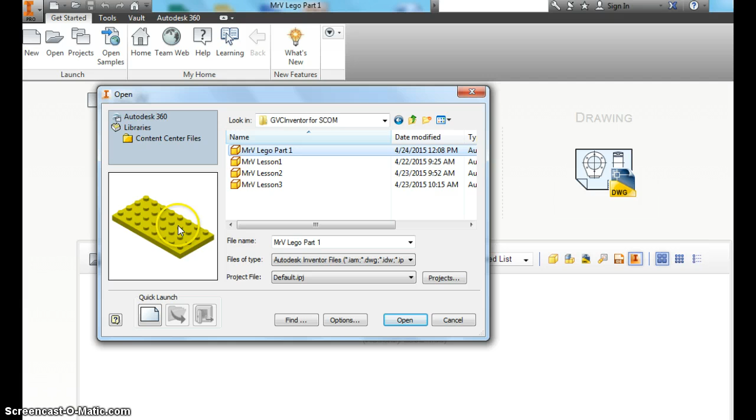You should have it saved as Mr. V Lego Part 1. Click it, get a preview on the side, and that's what we want. Hit open. The last thing we did was this rectangular pattern on the bottom, but we're still not done with the bottom just yet.

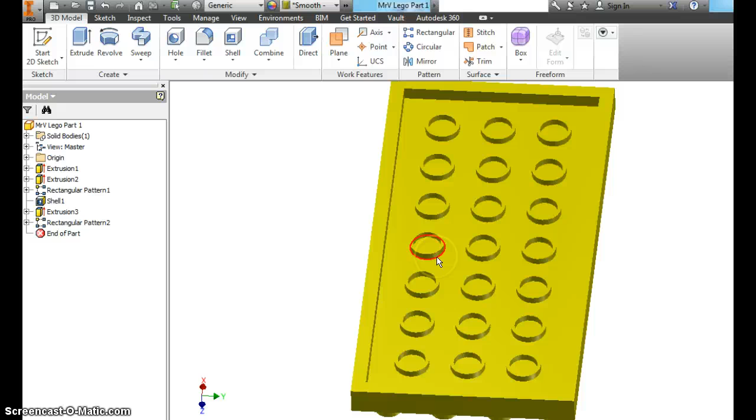Rotate it around where you can see this. We're going to make another sketch in here. There's some more circles on the bottom, and once you start doing this, you can come check the piece out. I'll have it set up on the table for you in the classroom.

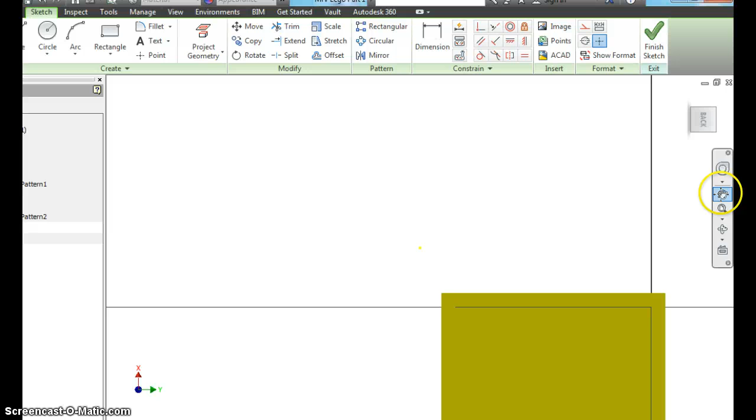Right click, new sketch. That's our face we want. Use the pan tool to maneuver that where you can see. I'm going to lean it back just a little bit so I can see. I like being able to see these holes where they're at.

Now what we're going to do, we're going to put 8 smaller holes and extrude them into it instead of coming out like these have. There's 8 smaller holes 4 times. There's a couple ways you can do this. You can make one circle and do a rectangular pattern, but getting the spacing right with that is pretty difficult. So we're going to do it a different way.

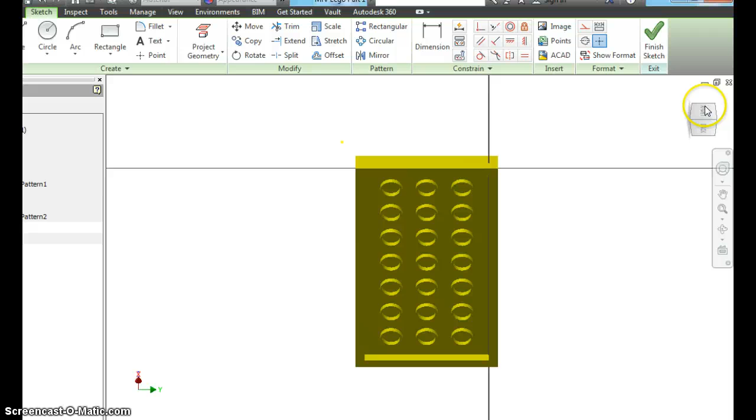I'm going to pivot this where I can see it a little bit better. And that's perfect. Now this color's glaring, pretty shiny. If you want to change it to a different color, that's okay. We need a circle.

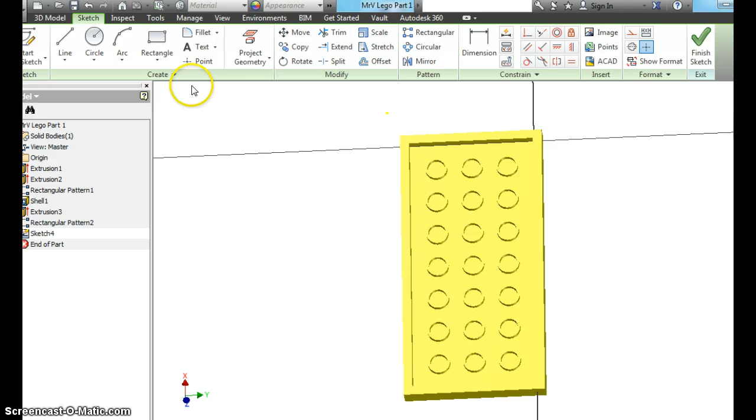This is going to be a really small circle. I'm going to start right here. I put that as 4 millimeters, but obviously that's way too big - you can see it overlaps. So we're going to go back and add a dimension.

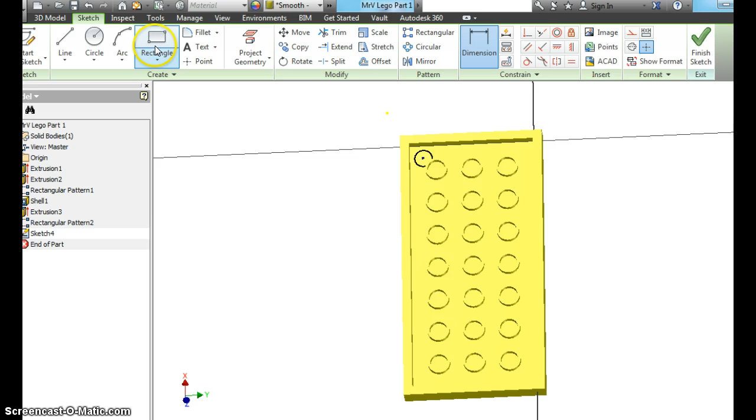Let's see... I don't like that. So go back there, let's undo that. We've got so many dimensions in here, you can see sometimes it becomes a problem. So let's drag that one and make it 2 millimeters. Hit OK, right click OK.

This is where using that trackball is really handy. To move your circles, you can't grab them on the outside edge or the circumference - you have to grab them at the center point. It's not letting me for some reason, but that's okay. So we're going to move this up a little bit. Let's add a dimension from here to here. That's one of the problems, we've got so much stuff going on.

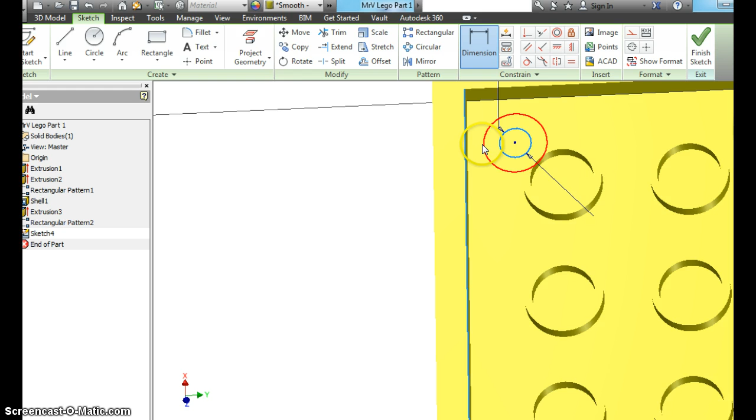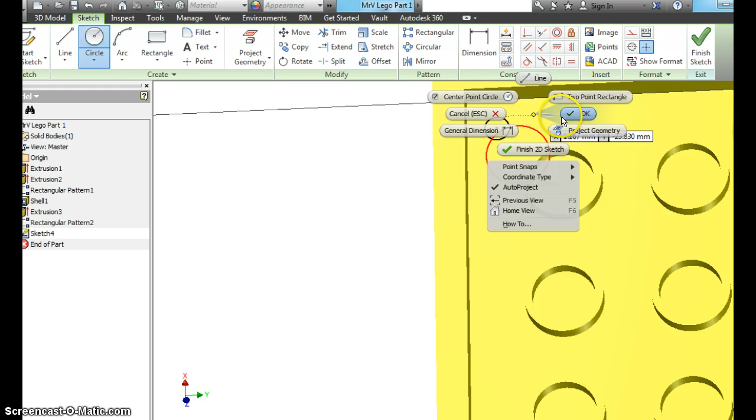We don't want to add a driven dimension. So we're going to do the circle again. I've paused it for a second and did some practicing and figured it out. Click a circle here. Drag it in there. Add a dimension to this circle - I want you to make it 2 millimeters.

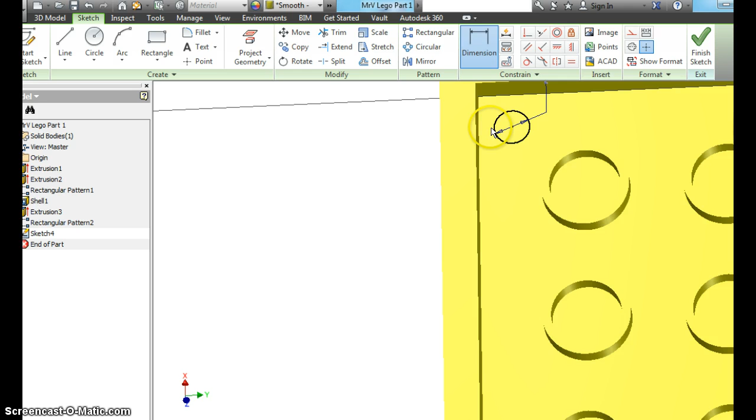Now here's why you want to zoom in. We're going to dimension from the center of the circle to this line here, not up here. So you got to zoom in with your trackball and make sure you get it right. Turn your dimension tool on - it should still be on from adding it to the circle. Get this red one here, bring it over. We're going to make it 1.5, moves it in close.

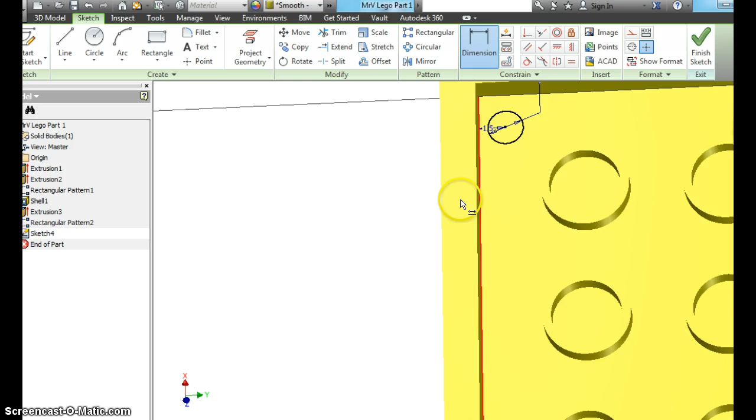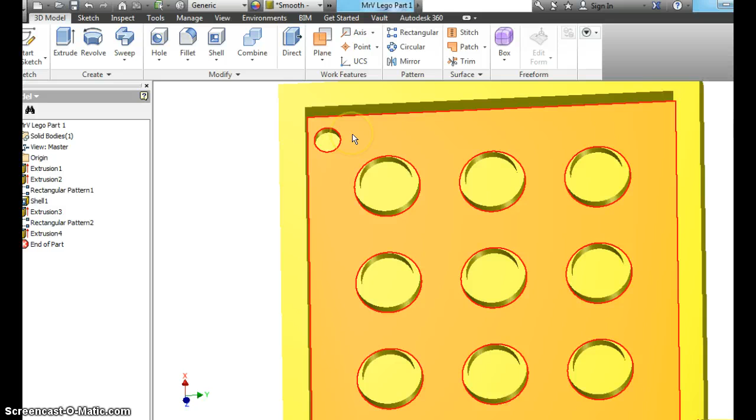On the back of this Lego piece, there's 8 of these circles going down. I'm going to go ahead and do an extrusion there. So finish 2D sketch, extrude this. We want it going into it, and we only want it going in 1 millimeter. It's a really small circle, and you can barely see it, but once you zoom in, you can see it's not very deep.

Now we're going to make it going across. We're going to do that rectangular pattern. We want this shape, direction 1, going this way. Move this to the side - there's going to be 4 going left to right. For spacing, 7's too much, it's going to be 8.

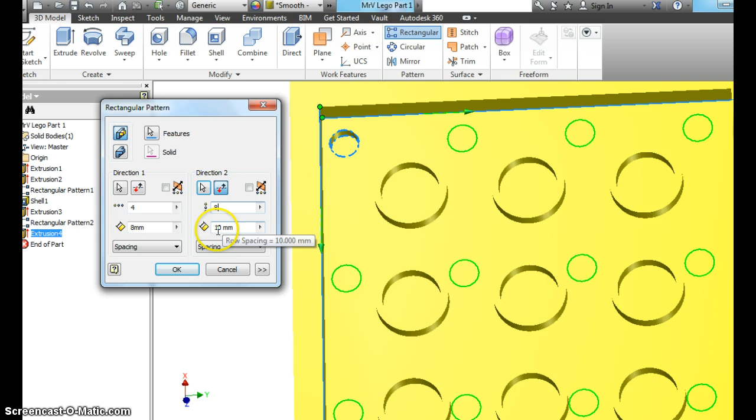Direction 2 is going to be down this line, and you can see it goes up - flip it. We want 8 of them, and I want this one about in the middle, so let's try 10 millimeters here as well. I'm going to zoom out so I can see, and honestly that looks pretty good. That's about perfect, so hit OK there.

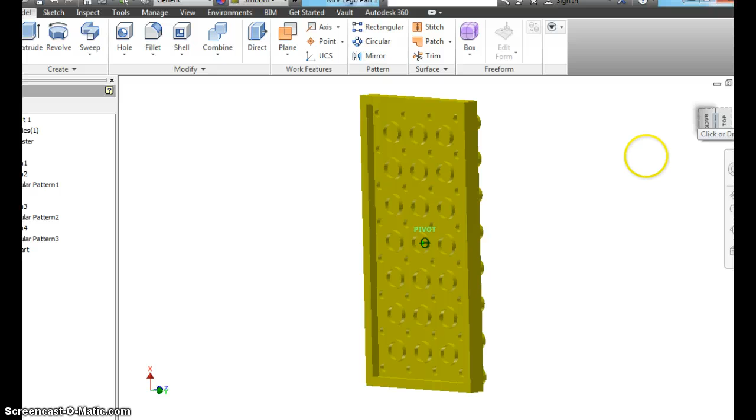Now you've got the bottom of that Lego piece done. Again, you can come up and compare it and you'll see how close it is. There's one last thing we're going to do on the top here.

The last thing we're going to do, we're going to put some text on here. Lego - if you look closely at the piece we're using, on the top of all the little connecting pins, it actually says Lego. So I'm just going to spin that back around, let you see what we've done so far.

We're going to right click here, new sketch. Okay.

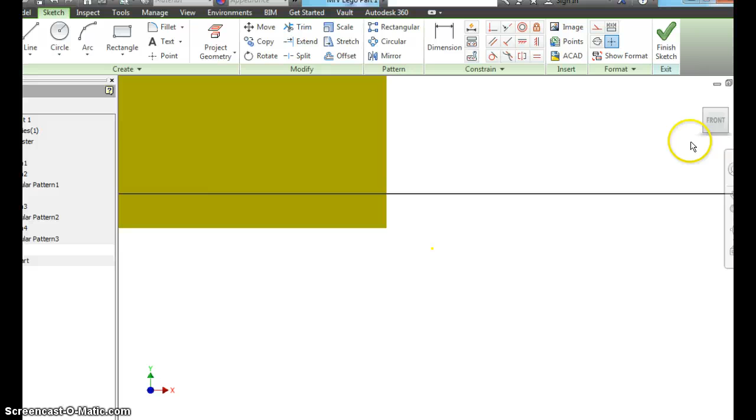Turn it around where you can see the pin. Let's see, I don't want to do that. So I'm going to click in this upper corner of the bottom, then zoom in and grab my pan tool.

This is where Inventor gets kind of complicated, but that's okay. This is a pretty complex part we're doing. This isn't something simple like we've done earlier.

We're going to do a text feature. Okay, we want that right here. And it brings it up. So I'm going to type Lego in all caps.

That size is way too big. We know that. Let's make it 0.95 millimeters. Okay, and I'm not real happy with that, we don't want it to do that. Okay, so let's undo that.

Put another text bar in there. Size was pretty good.

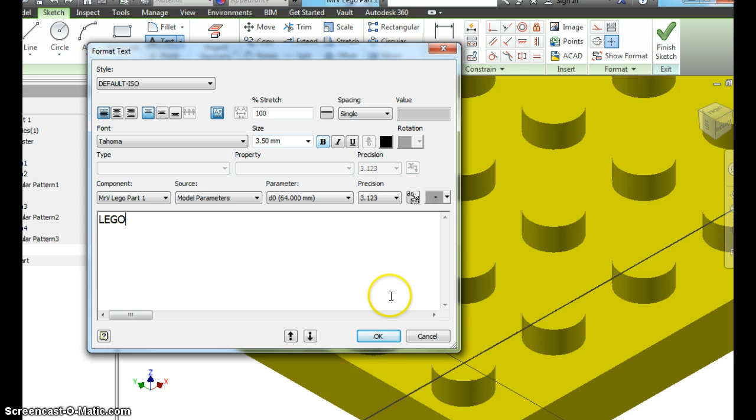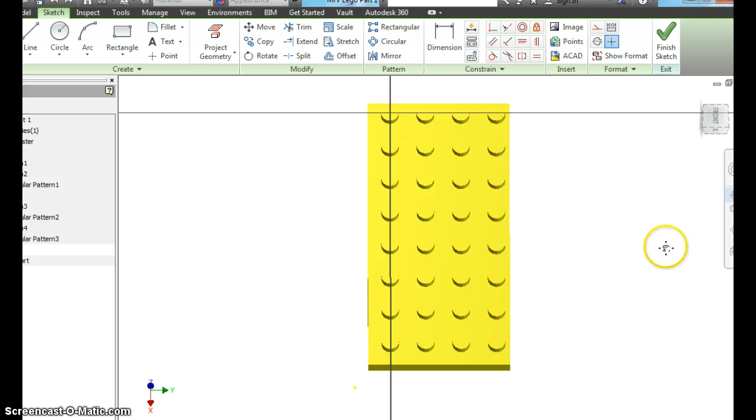Okay, you saw the text didn't go the right direction, so we're going to fix that. Click your home button, click front. You can't see your pins obviously, so you're going to have to drag and pivot a little bit. Then come over here and get your pan tool, move it where you can see, turn that off. Let's zoom in, go back to our pan tool, and you can see we're getting, again, this is a pretty complex project. It's not something simple.

So now we're going to try and put some text on one of these pins. Make your little text box on the circle. Let's type Lego. Let's change the size to 0.95 millimeters. It's still way too big. Okay.

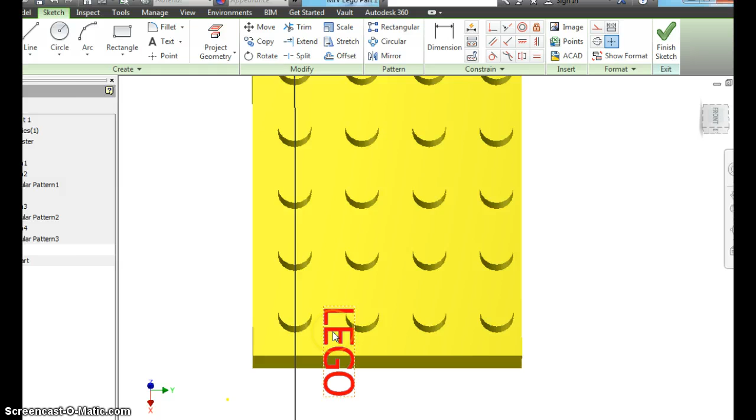Okay, so you can double click that text and edit it. That size looks pretty good. Now we have to figure out why that's going that direction.

And we're okay with that. For what we're doing, that's fine. That text is just a little too big. Again, highlight it. Let's try 0.90 millimeters. And that looks pretty good. Okay.

Okay, now one tool I have found, well, that's kind of new. Let's see. Probably the easiest thing you're going to be able to do, because there is no way to choose this and emboss it into all, or to put the text into all of them. So double click it. 0.90 still too big. Let's try 0.80. See how that looks. That's perfect.

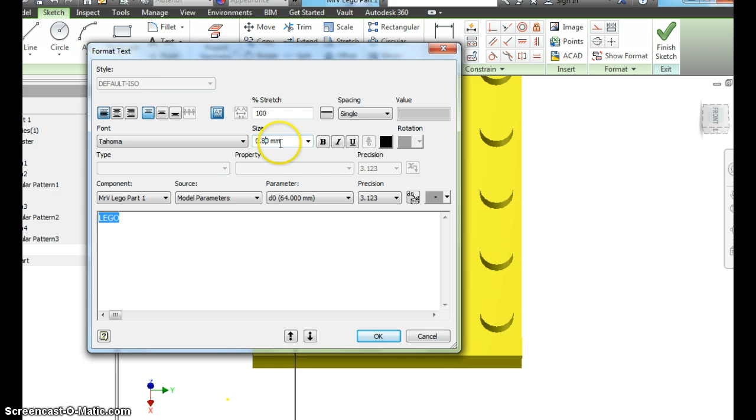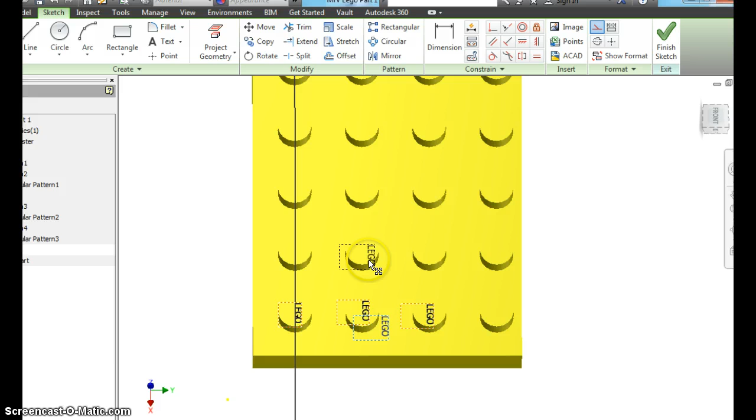Okay, so change this one. Highlight it. 0.80. Hit OK. And now we're going to copy that and paste it. Unfortunately, you are going to have to drag it to each one. So I'm going to pause it and do that to all of them, but just right click. We've already copied it once. Paste it, find it down here, and drag it and move it onto the pin. Okay, so I'm going to pause this and do all these.

Okay, now you can see that took a while. I paused that while I did it, but I had to paste Lego 32 times and drag it and center it as best I can with this. Okay, so now we're done with that.

So let's right click, finish 2D sketch. Okay, and you can see our Lego on there. You can see they're not perfect. Okay.

Now I'm going to do an emboss. Okay, I'm going to move this. Click that. Let's see. If you hold shift down and click on each word, it's going to let you do multiple ones. Let's see if it does that. Let's make it go out.

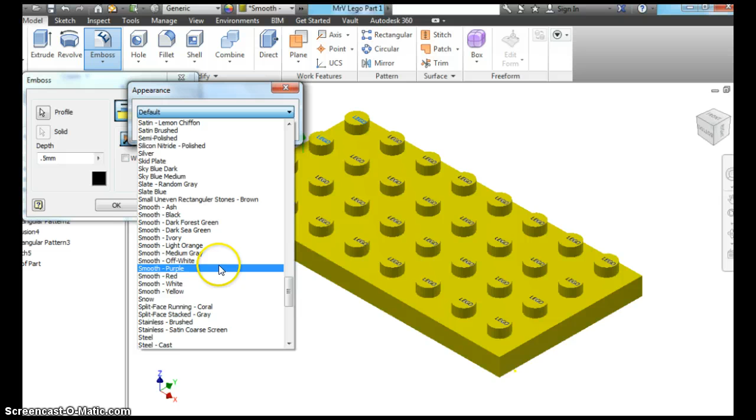0.5 millimeters. I'm going to change that same color to smooth yellow, okay, because we want it to look like the actual part. So whatever color you've chosen when you do your emboss, find that same color. Let's see what happens here.

Okay, and now you can see that the Lego is embossed. Now earlier we did an engrave on your keychain where it went into the part. Now it brought it out, and you can see the rest of my Legos aren't showing up, so I messed up. I'm going to have to undo that.

Do your emboss again, and you need to hold the shift button and click every single one of them. Okay, it turns blue once it's got it. It may take Inventor some time here. Give it time to load if you're doing multiple commands. But this is easier than going and clicking on each one like we had to do with writing the text.

And there's probably an easier way to do that. I did a little bit of research and I couldn't find anything. So I'm clicking on each one. As I click, I'm holding down the shift button. Okay, make sure you do that. You can see it turn red and then it turns blue.

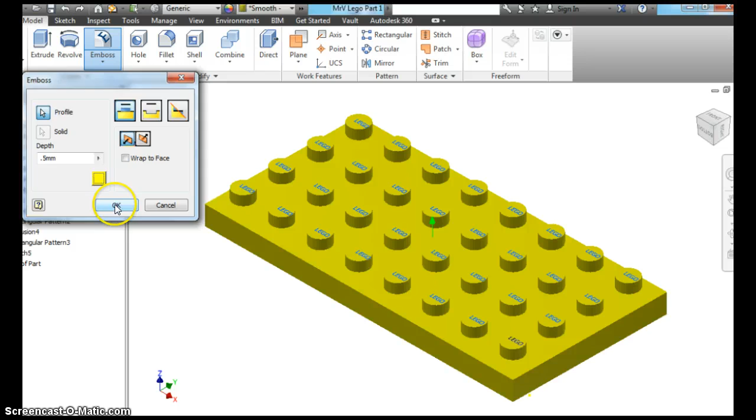And you can see it raised them up, and it looks like I forgot one. Okay, so make sure you get all of them, but you have a completed Lego piece.

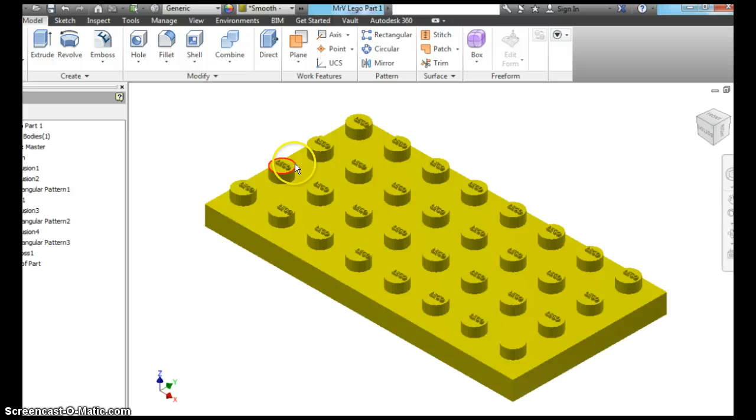Okay, and it looks exactly like the piece that's going to be up at the table in the front of the room. Okay, so this is a pretty tough build. Take your time. If you have a point where you need some help, ask your neighbor. If they can't help you or they're not as far as you, raise your hand. I'll be glad to come over and help you. Okay, but we've made an 8x4 Lego piece. Until the next time, see you then.